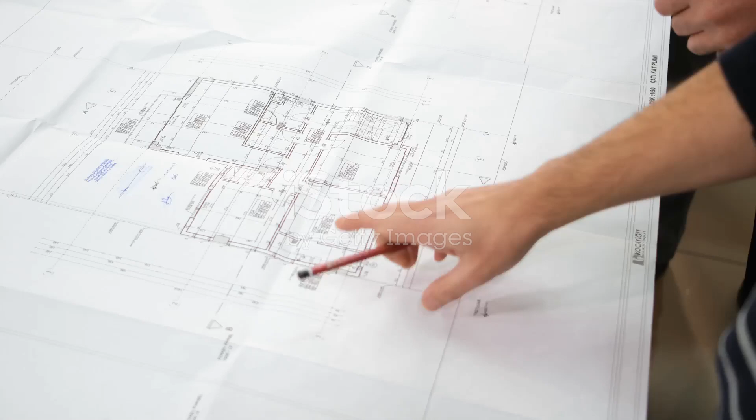Shop drawings are detailed drawings created during the construction phase of a project. They illustrate exactly how building components will be fabricated and installed. Contractors and subcontractors prepare these drawings. Shop drawings translate the architect's vision into buildable instructions. They cover everything from steel connections to window installations.

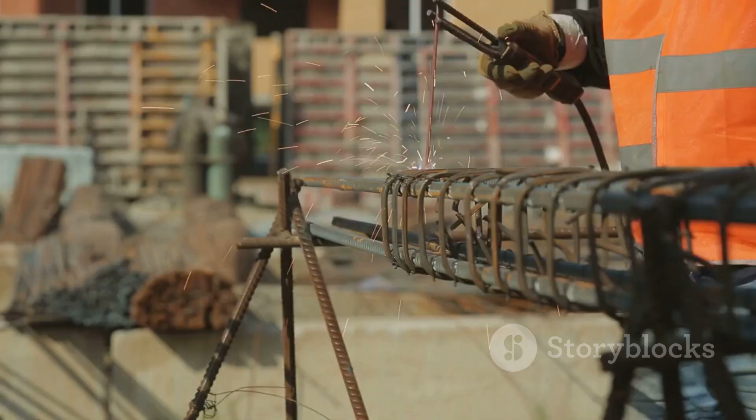Imagine you're building a house. The architect provides a blueprint. This blueprint shows the house's overall design, but it doesn't detail how to build specific parts, like the staircase. This is where shop drawings come in. A staircase subcontractor would create shop drawings. These drawings show the exact measurements, materials, and installation details for the staircase.

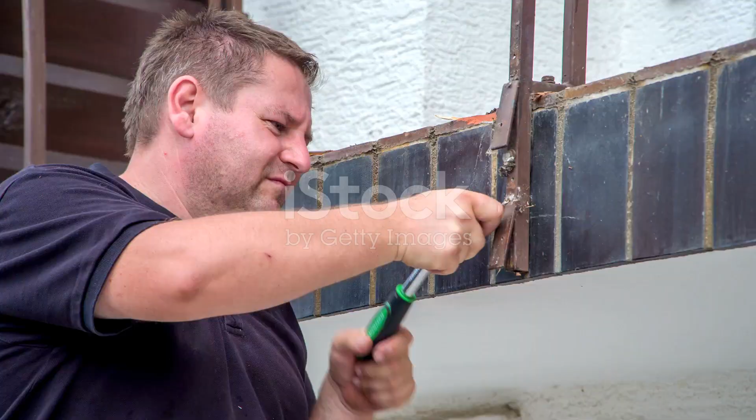Shop drawings are more than just technical instructions. They serve as a communication tool. They ensure everyone involved is on the same page. Shop drawings prevent costly mistakes. They keep the project on schedule.

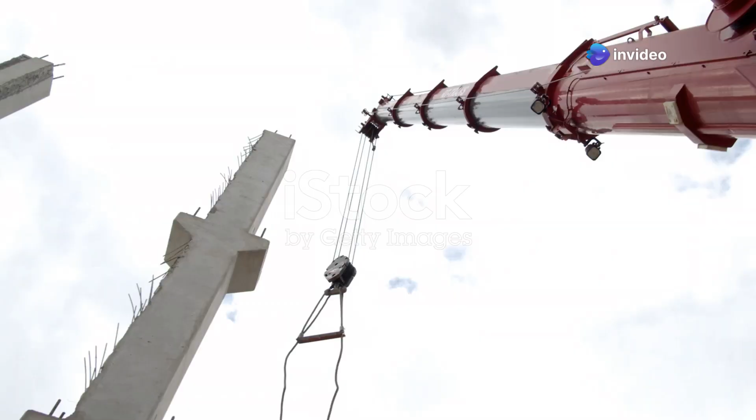Why are shop drawings so crucial in construction? Firstly, they ensure accuracy. Shop drawings translate general designs into precise specifications. This leaves no room for guesswork. This precision is vital for prefabricated components. These components need to fit perfectly on site.

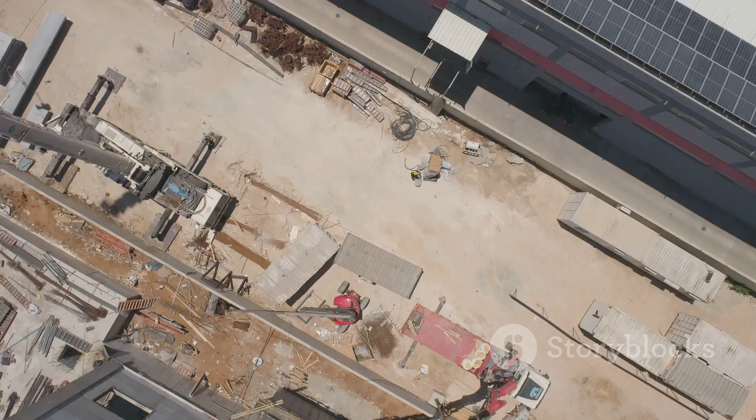Secondly, shop drawings facilitate communication and coordination. Large construction projects involve numerous stakeholders. This includes architects, engineers, contractors, and subcontractors. Shop drawings act as a common language. They ensure everyone understands the project's finer details. This shared understanding minimizes misunderstandings. It also reduces the likelihood of errors.

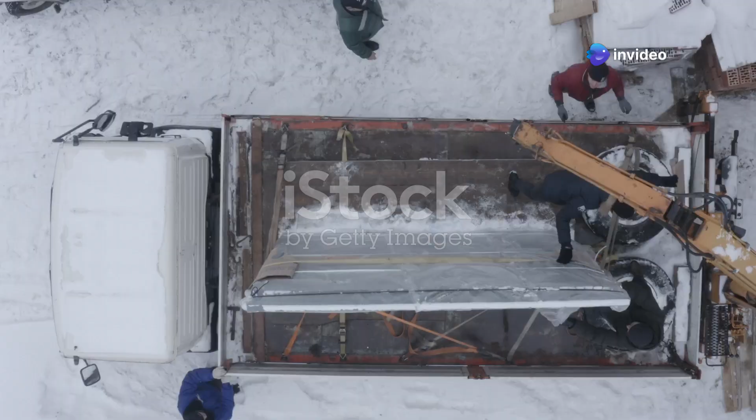Thirdly, shop drawings help manage risk. By detailing the construction process, shop drawings help identify potential issues early on. Early identification allows for timely solutions. This proactive approach prevents costly delays and rework. It ensures the project stays on track and within budget.

Finally, shop drawings provide valuable documentation. They serve as a record of the as-built condition of the project. This is essential for future maintenance, renovations, or expansions. This detailed documentation can be crucial for resolving disputes or making insurance claims. In essence, shop drawings are an investment in the long-term success of the project.

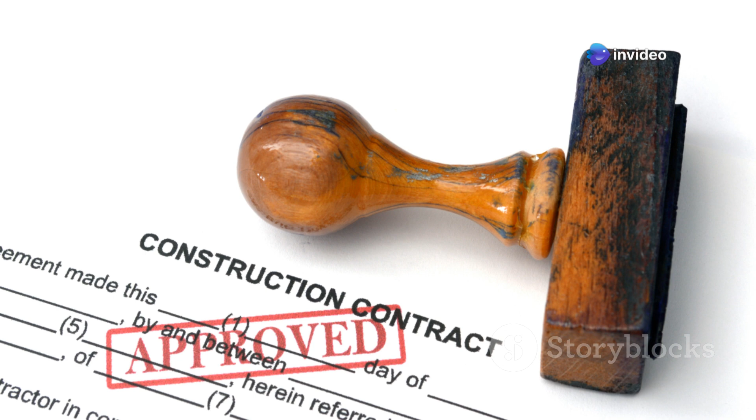Effective document control is crucial for shop drawings. It ensures the right information reaches the right people at the right time. Let's break down the process into key stages. Receipt of submittals. Subcontractors submit shop drawings to the general contractor. The general contractor date stamps and logs them. This system could be electronic or paper-based.

Review and evaluation. The general contractor checks for completeness and adherence to specifications. They check for discrepancies with the architectural drawings. Revision and resubmittal. If issues are found, the drawings are revised and resubmitted.

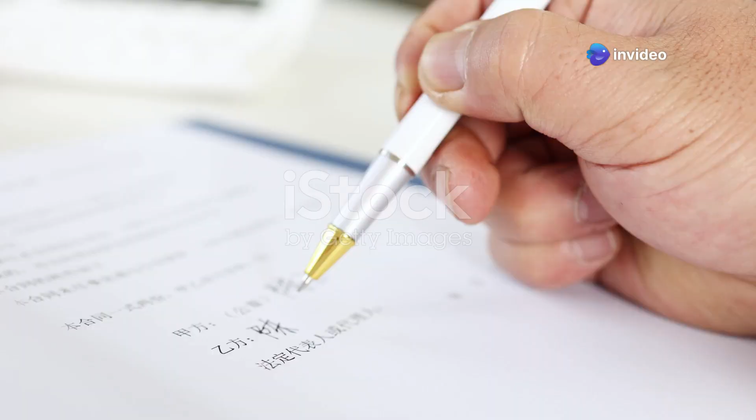Approval and documentation. Once approved, the drawings are documented and communicated. The approved shop drawings guide fabrication and installation. Tracking and distribution. Keeping records of revisions ensures everyone has the latest information. The approved drawings must reach the relevant tradespeople on site.

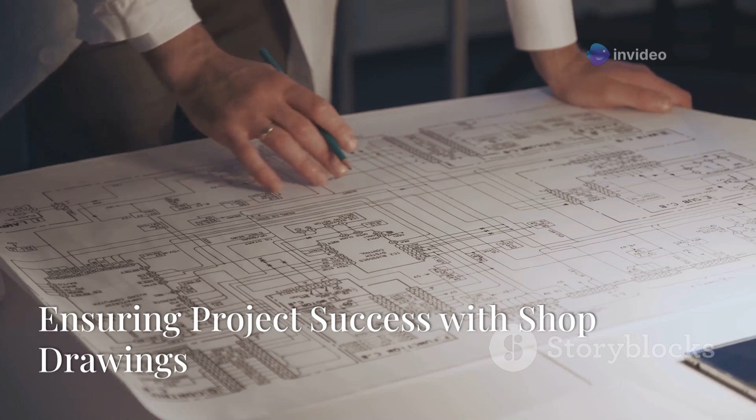Shop drawings are more than just technical drawings. They are essential tools for successful construction projects. They bridge the gap between design intent and practical execution. By providing detailed information, facilitating communication, and managing risk, shop drawings contribute to projects that are completed on time, within budget, and to the highest standards.

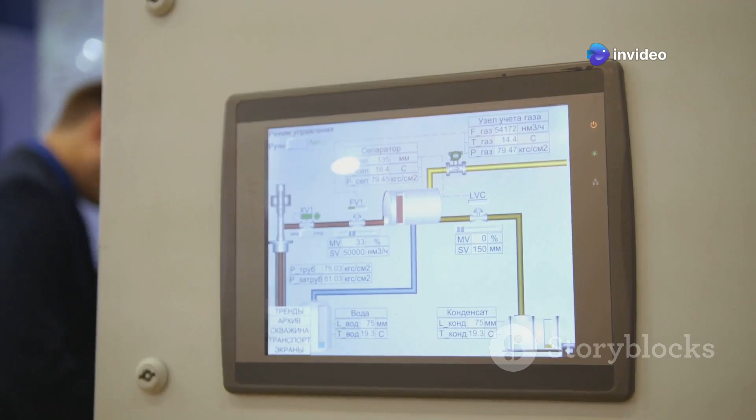A robust document control process is paramount for maximizing the benefits of shop drawings. By implementing a clear system for receipt, review, approval, and distribution, project teams can ensure that everyone is working from the same information, minimizing errors and promoting a collaborative and efficient construction process.